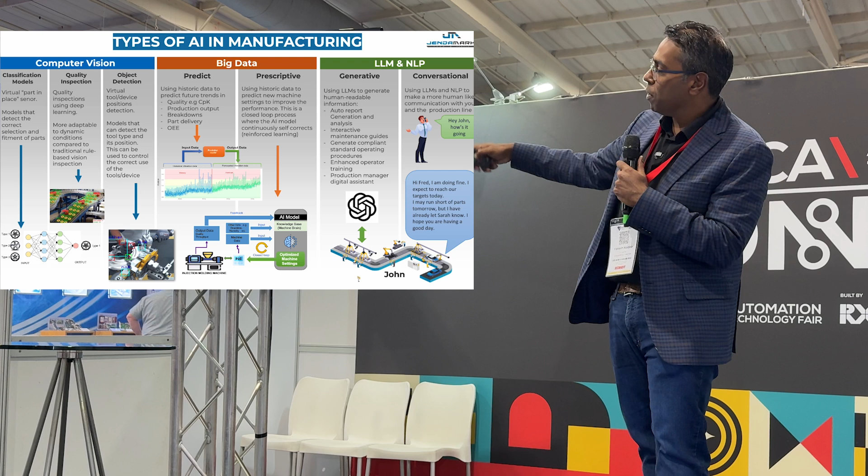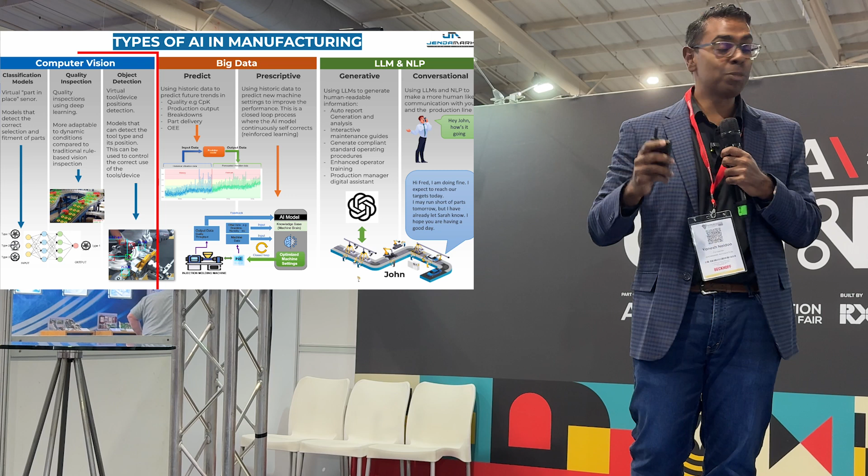So I'm going to start off with computer vision. Computer vision is a very simple concept - it's basically the same process we have with our brain. We have an eye that can see a bowl of fruit. The brain processes that based on your years and years of learning about different kinds of fruits, and then it outputs what is in the bowl. As a kid, that's what you go through - you learn that this is an apple, this is an orange - and that's exactly what machine learning from a computer vision perspective is, from a technology perspective.

So this is a technology version of exactly that. You have a camera, some computer system - think of that as the brain - and you can teach this computer system to read the images from the camera and teach it to say there's apples, oranges, bananas, etc. That's ultimately what computer vision is trying to do. When we talk about these fancy terms about machine learning, models and algorithms, all we're doing is writing some software in the computer to recognize and classify what those objects are. So how do we use this in a factory?

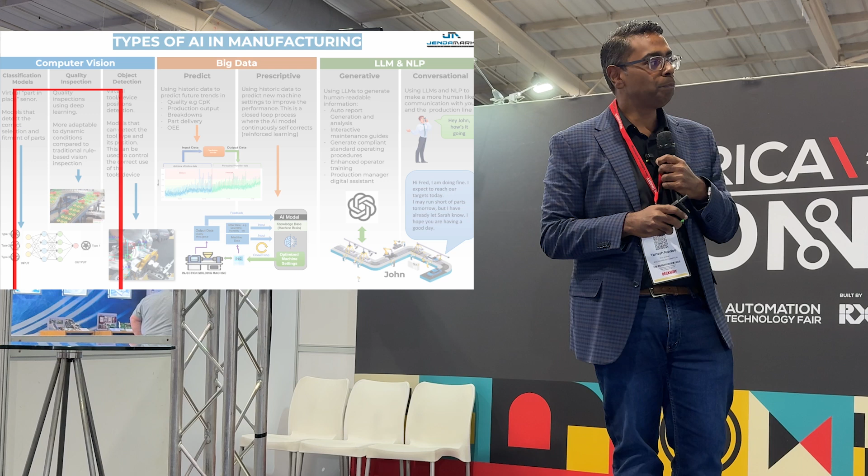Let's talk about one kind of computer vision - the first one is called classification. Classification is very simple conceptually. This is an example of three different types of rims. What we can do is input thousands of images of those three types of rims and call them type 1, type 2, type 3 - that's what we call labeling the image. We can put this into the fancy algorithm - I put this here to make myself look clever, I actually don't know what's going on in there, but the computers do all of that stuff - and out of that, we can then create this model.

So then if I give it an image it hasn't seen before, it'll recognize that that is type 1. And if I put the type 2 rim in, it'll recognize that that's type 2.

So how do we use that in a factory? Today, the biggest use case is actually picking of components inside a factory. So you have these classification models, and a whole bunch of rims. Is your new BMW X5 coming down the line that you've ordered with 25-inch rims with low-profile tires? The robot needs to know which rim to go and pick to fit onto your BMW X5. You can use a classification model to select which rim needs to go into your particular car. The algorithm can do that, and then you pick the right rim. Today, what happens is a human goes there and recognizes the rim type, maybe puts that into a machine that then gets automatically put in there, but now we can close the loop in that picking process.

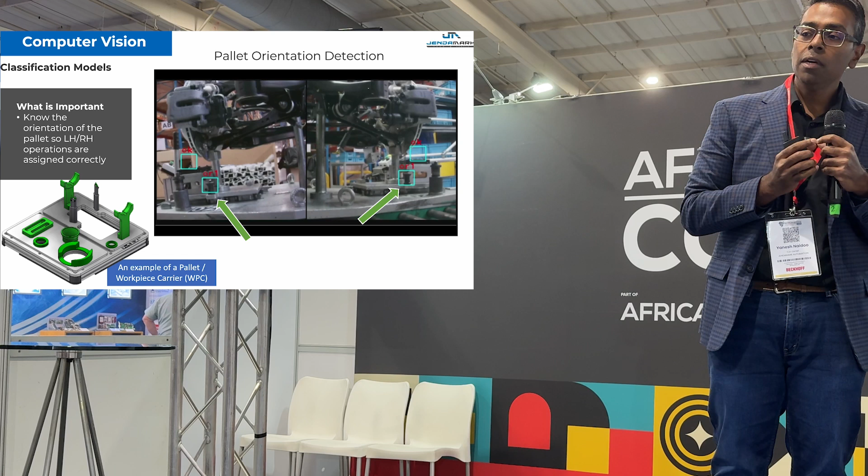Here's a real example, sticking with the BMW theme. This is a video from BMW in Rosslyn, a supplier to BMW. These are the X3 axles, and what we've done is created a classification model to determine the orientation of what we call a pallet. We assemble the axle on our big production lines on this pallet. What's very important is that we need to know left and right, because if I'm tightening the left-hand bolt, I need to know the axle is in a certain orientation so I tighten the right bolt. So you always need to know the orientation of the pallet.

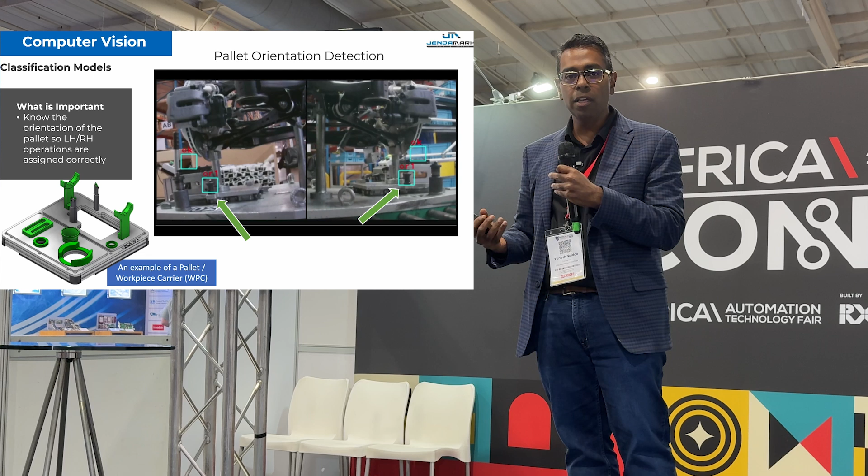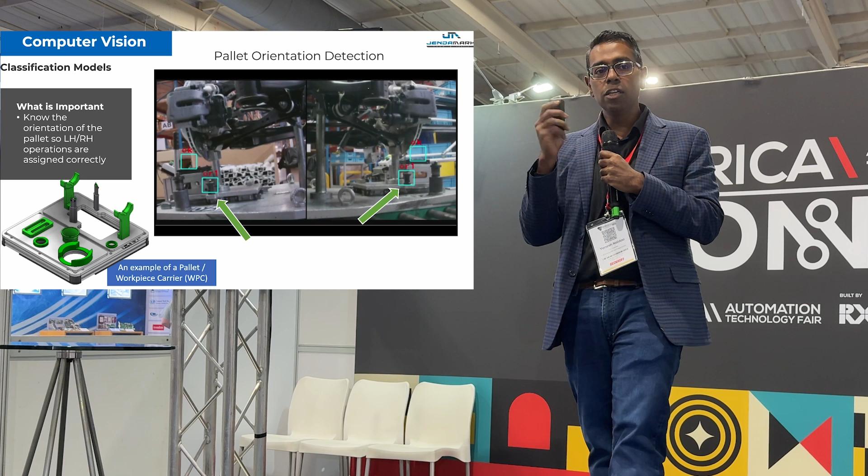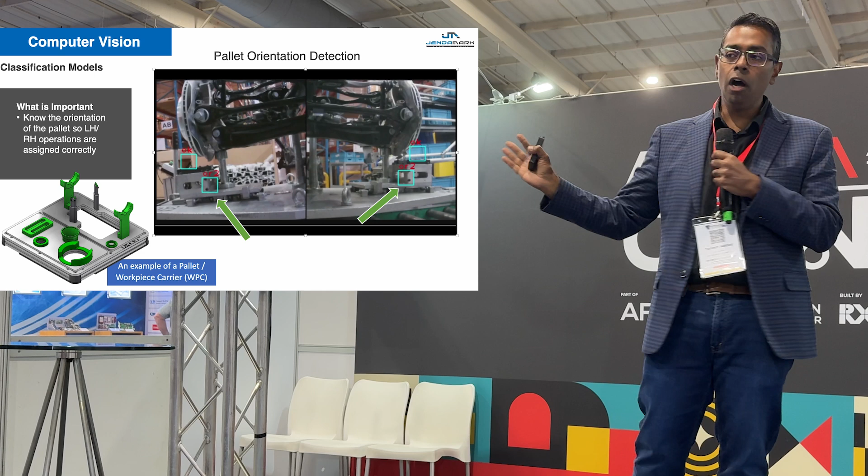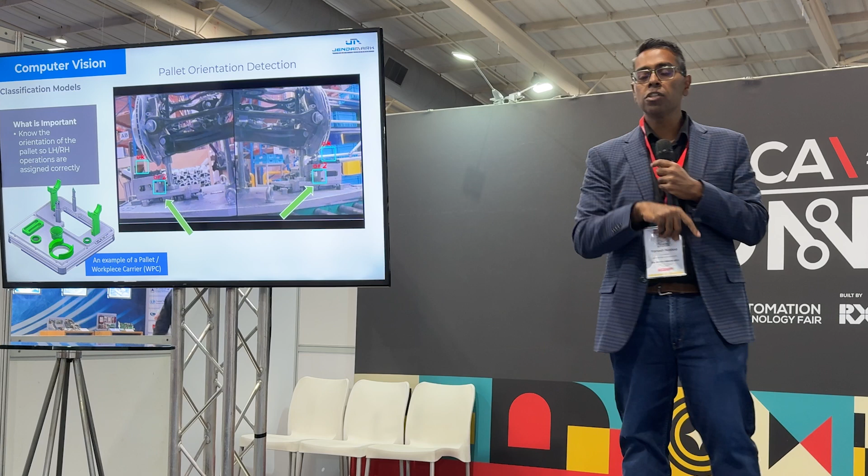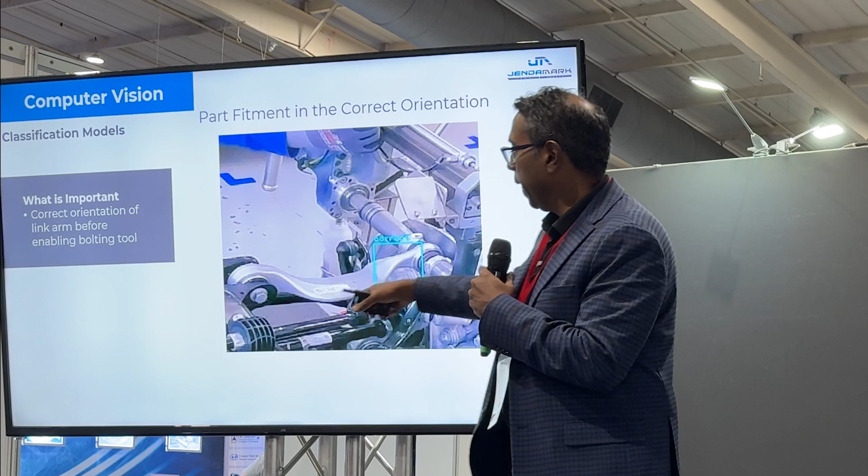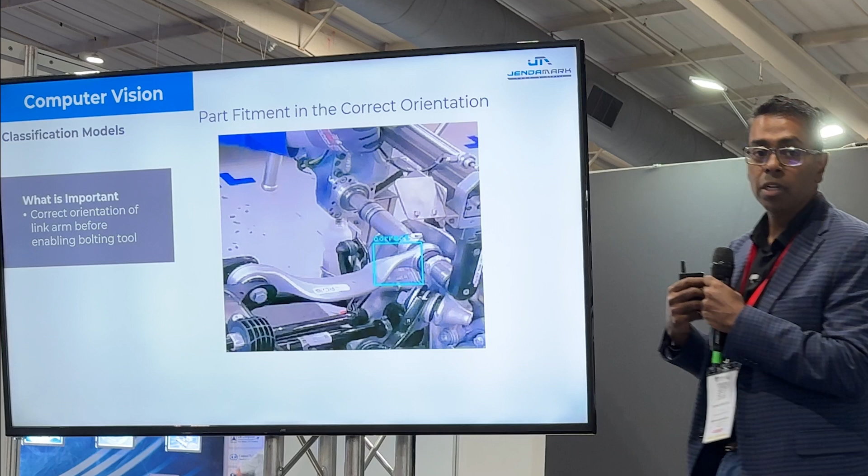The next example is very critical. You definitely don't want to buy a BMW with this, what we call a link arm, in the wrong position - you can see it's a banana shape, and you don't want the banana shape the other way around. So this is detecting that it's in the correct position. When it's correct, we allow the operator to switch on the tightening tool to tighten the bolt. If it's in the wrong position, the camera tells the bolting tool not to switch on. That's how we can now control what was previously not possible - the orientation of that link arm. It changes the dynamics of your vehicle.

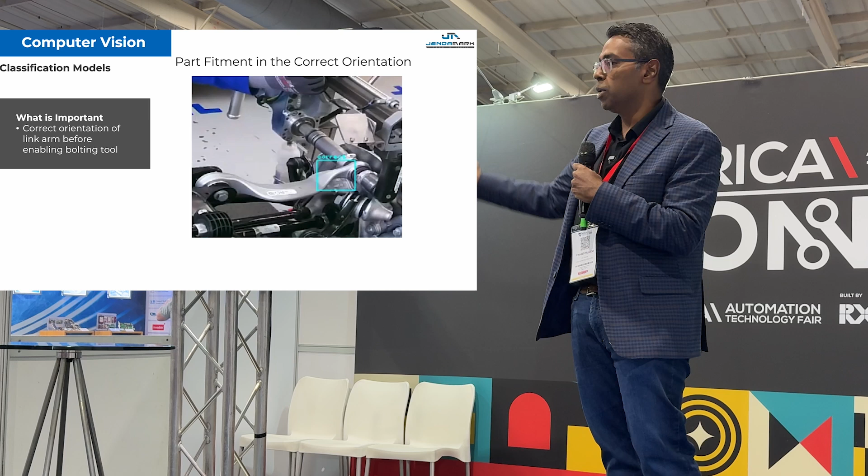So here, again in the video, when the operator turns it around, the other link arm is in the wrong position, and we basically say 'other' - and when it's other, we don't allow the bolting tool to switch on, so the operator can't make a mistake. This is an example of how we use technology to reduce the skills required by an operator to make effective quality components. I think the concept of technology requiring more skills on the shop floor is a misnomer. Technology should be reducing the skills barrier so more people can enter the workplace without skills, and enabling those people to work effectively.

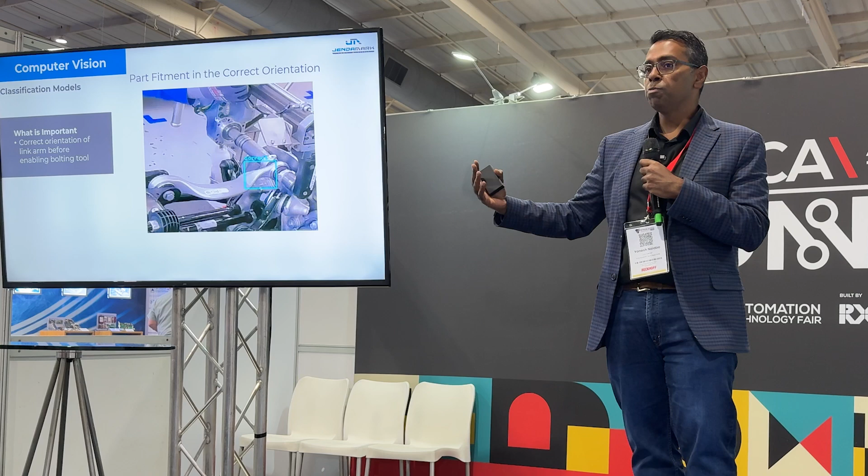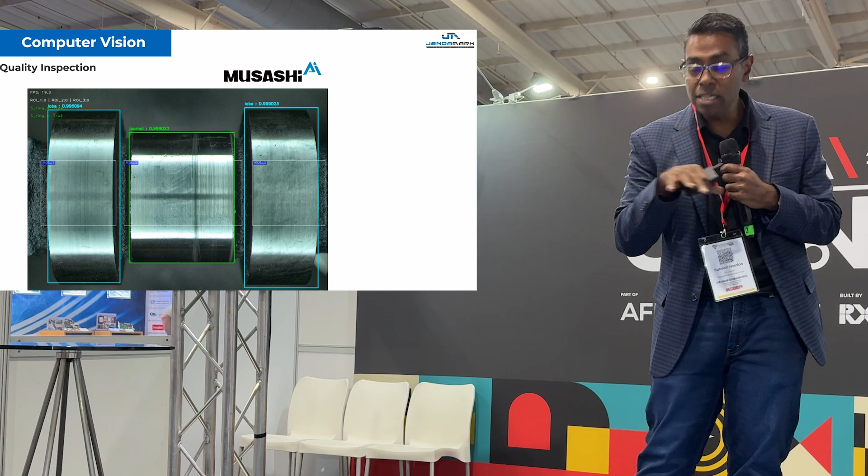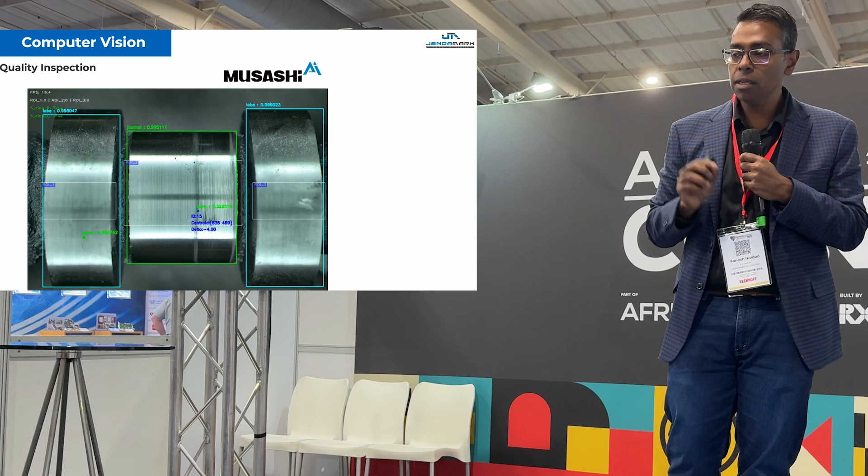Another example, another kind of AI that is used, is quality inspection - I think this is the most common one. I'll quickly breeze through this, but this is an example of a very difficult component to inspect: a camshaft of an engine. You have these small imperfections on a camshaft that need to be detected, and only very trained operators with years of experience identifying these little blemishes on these precision surfaces are able to detect these faults. Now, Musashi has created a model that can actually detect these blemishes inside these very critical components that go into an engine.

Another use case of computer vision AI for quality inspection. I'll quickly show you the next couple of examples, and get through the animations.

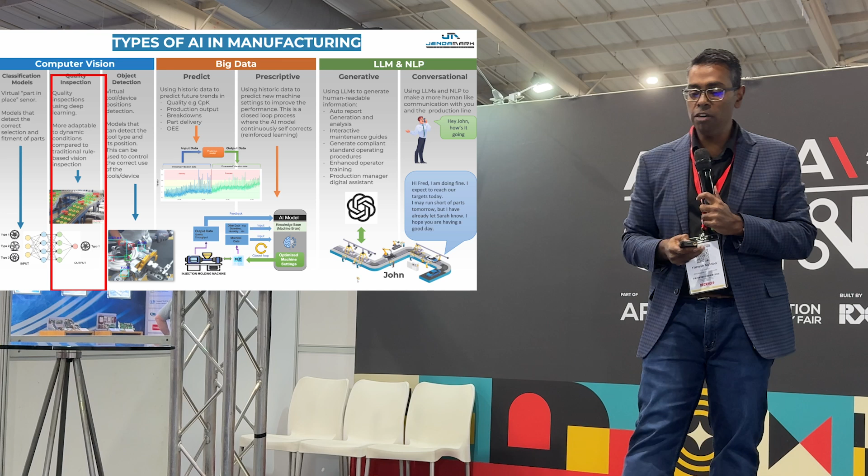Probably the most interesting part of computer vision, I think, is this concept called object detection - how we can use computer vision to detect objects in 3D space. Think of a self-driving car: there are cameras that detect objects, classify what the object is, classify where it is, and make a decision - do I run Andre over, or do I avoid Andre? These are the object detection models running in self-driving cars.

But how can we use that concept on the shop floor? This is an example of object detection from a concept perspective. We have an input image or video, some clever stuff happens - and I call it that because I don't fully understand what's going on inside those boxes - and the output is what we call an object detection model. It can determine it's a dog, and the coordinates of the position of the dog, a person, and a bicycle. So I know, in 3D space on a video, exactly what the live coordinates are of an object, no matter what the object is.

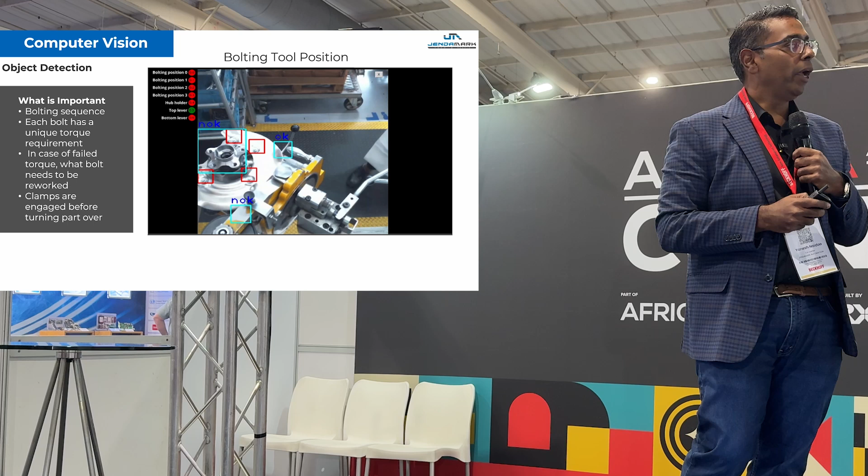Here's an example where, in this case, it's out of scene at the moment - the object we're tracking is actually a bolting tool. Before I play the video, let me explain why this is important. You see these four bolts being tightened - this is a BMW X3. The sequence in which we tighten those bolts is important, because you never tighten in a circle, you tighten zigzag. There are many components in a car that need to be tightened in a certain pattern.

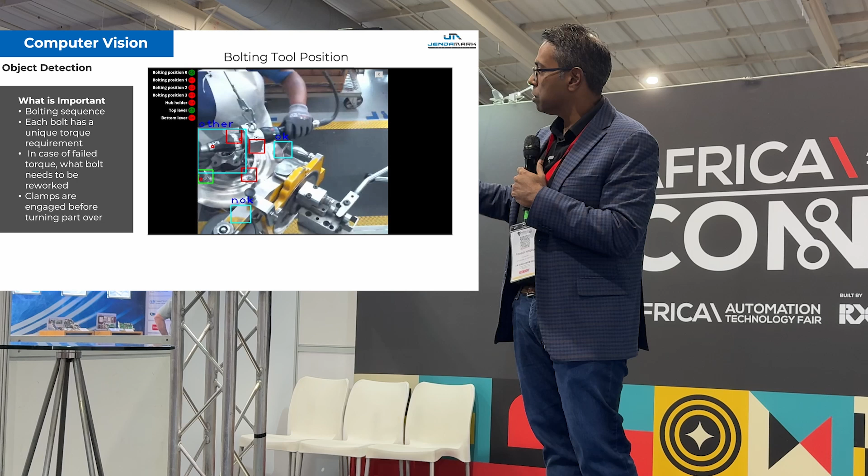So how do you ensure that pattern is adhered to? Only when the bolting tool comes into the right region of interest, as we call it, do we switch the bolting tool on. The operator can't pull the trigger unless it's in the right position, and you'll see that now. She brings it into position, takes it to the first position - you can see the three dots are the key points of that object, the socket - and only when it's in the right position do we switch it on.

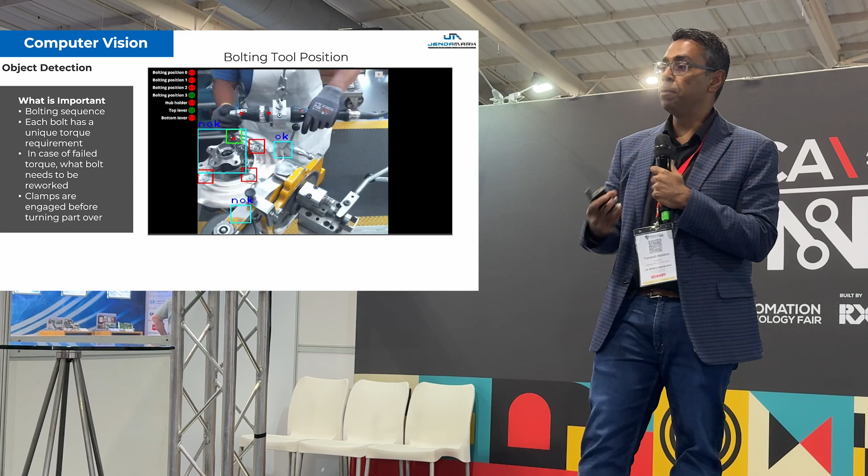What we're doing here is reducing the skill required for a person to perform this operation - we're not increasing the skill needed to use the technology. Technology is actually lowering the barrier to entry for people to get jobs. So this notion that AI is going to take jobs away - I think that's not entirely true. It can in some cases, but in many cases it can actually create opportunities for people.

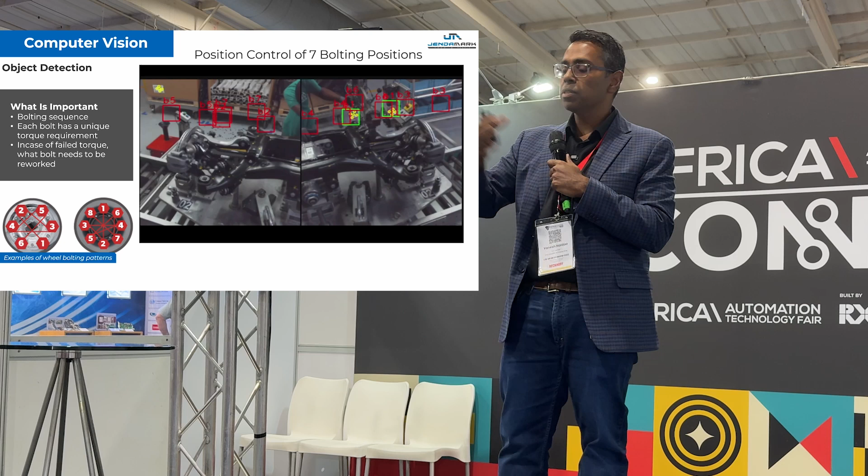Here's another similar example in the same factory, where we're checking the position of the bolting tool. There are basically seven positions the tool needs to be in, and the operator needs to remember the exact sequence. If you do this eight hours a day, it's very easy to make a mistake. Now the AI is tracking the position of the bolting tool, and if it's in the wrong position, we flash a red light to say go to position one, two, or whatever it is. It's exactly the same concept.

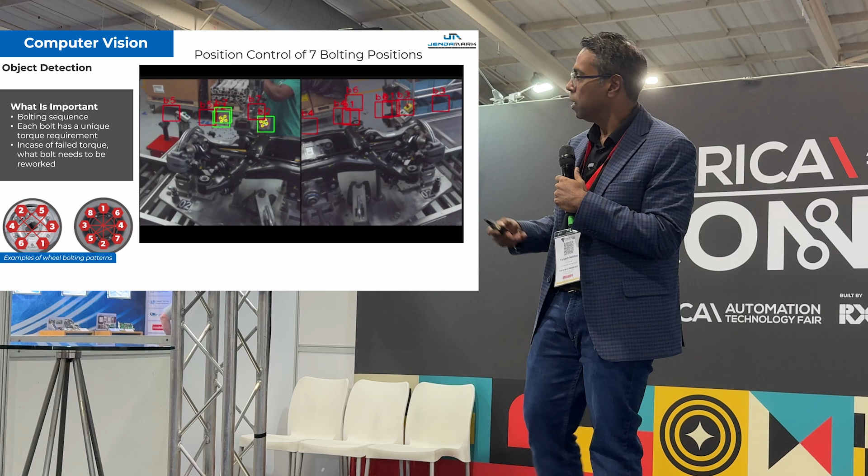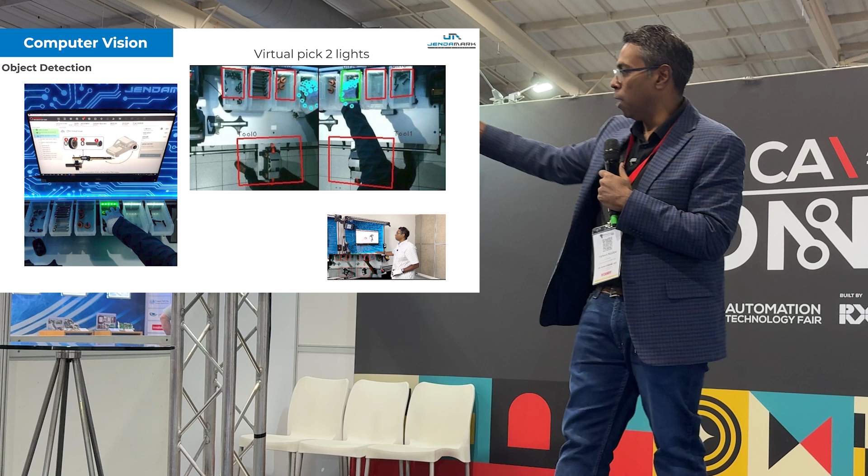This is an example of tracking the hand. This particular video shows me going into a bin to pick the right component - if my hand goes into the wrong bin, it flags it and tells the operator wrong bin. So I can track the position of the hand to ensure I'm picking the right components from a part bin, for example. Probably one of the coolest ones I really enjoy is to replace various components on a factory.

So here, what I'm simulating is a push button. You'll see it in the video. I have a sticker, which costs all of a few cents, and using the same AI model, I'm able to put my finger on the sticker and simulate a physical push button. So now I'm virtualizing physical devices, and I don't need those physical devices. You walk outside and find all the push buttons - to get a push button to work inside a factory will cost you 10K before you start. Now I've virtualized that, which means I can make 50 push buttons if I want - one for the left-hand operator, one for the right-hand operator, or any number of these virtualized devices because it's software.

That's the opportunity with AI. This idea that the stations are going to get more expensive is completely incorrect - I think the stations get cheaper and much more flexible using AI. So that's computer vision. Just watching my time.

I'm going to breeze through the big data as quick as I can, but there are two sections within big data: predict and prescribe. On the big data side, there's a couple of examples I want to share with you - the first is the most common one.

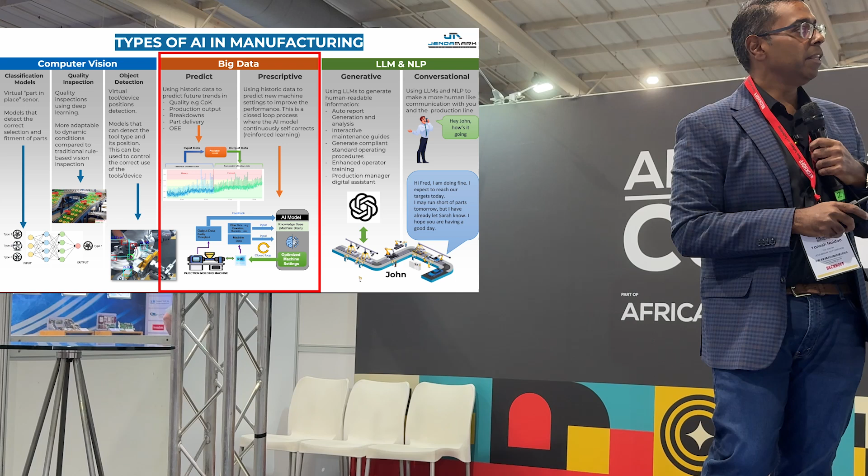Predictive maintenance has been a hype for a long time, and everyone talks about it, but basically what it is, in this case, is a vibration profile of a machine. Think of your pool pump, your fridge at home, your aircon at home - when you walk past that fridge and it's sounding funny, vibrating differently, that means there's a problem. The vibration sensor detects that, and with some clever stuff in the background it's able to predict what it's going to look like into the future, so you can proactively call someone out to fix your fridge. That's what you do on any vibrating asset.

These are very simple models. The hard part about vibration is actually sampling it at the right speed, which is not an AI problem or a technology problem - you can find high precision vibration sensors out there, that's not going to be an issue. But it's a very simple concept. There's a lot of hype around predictive maintenance, but it's not a very complex concept - you just think of your fridge, you walk past and hear it sounding different, and you know there's a problem.

What is interesting is another concept called autoencoders, and you can just replace the word autoencoder with the concept of anomaly detection. So how do I detect anomalies? The autoencoder concept is very simple - this is slightly technical, but bear with me.

Imagine I input a picture of a cat. An autoencoder is basically like zip files - you guys know zip files. We shrink that image down as much as possible to the smallest possible size, and then I have a decoder that decodes that image to try and replicate it. What I do is compare the input image with the output image, and the difference tells me my error.

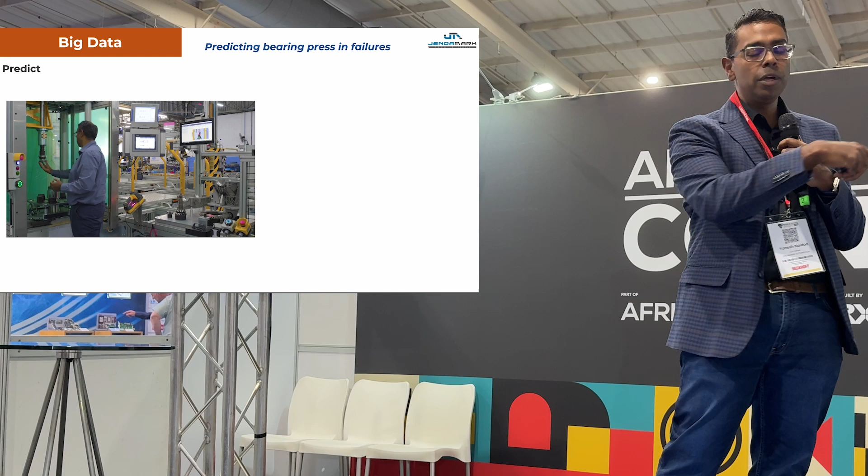So how have we used it? Here's me on one of our production lines, fitting in a set of bearings that get pressed into a differential - the differential is obviously a key part of the car. What you'll see here is me loading the differential, and it's very important that we monitor the force and displacement of the bearing.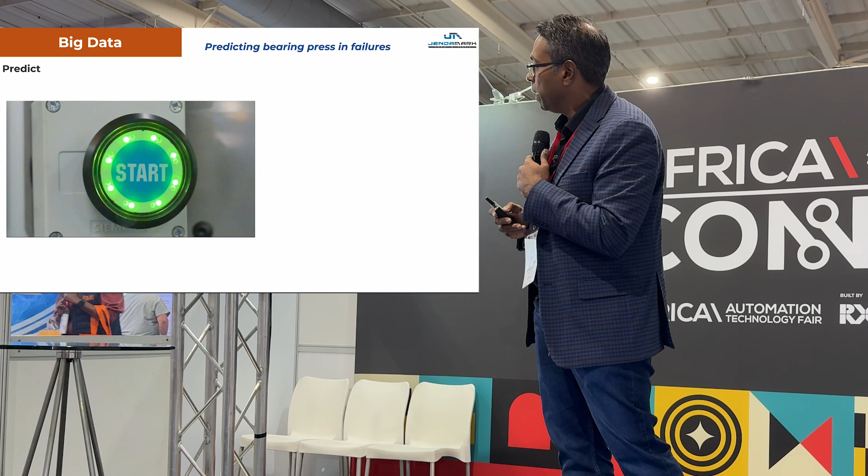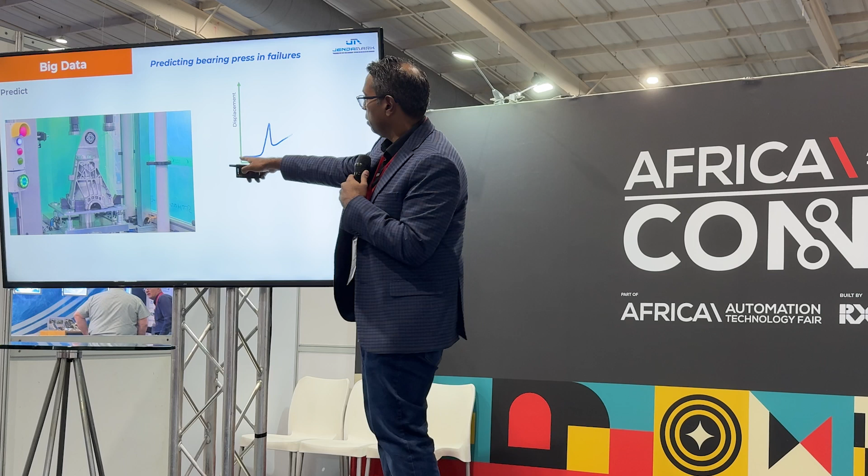Basically what happens is when you start the machine, there's a force displacement that we monitor. As you press the bearing in, the displacement goes up, the force goes up, and you have this thing. This is where it makes contact, and then it needs to rise up like this.

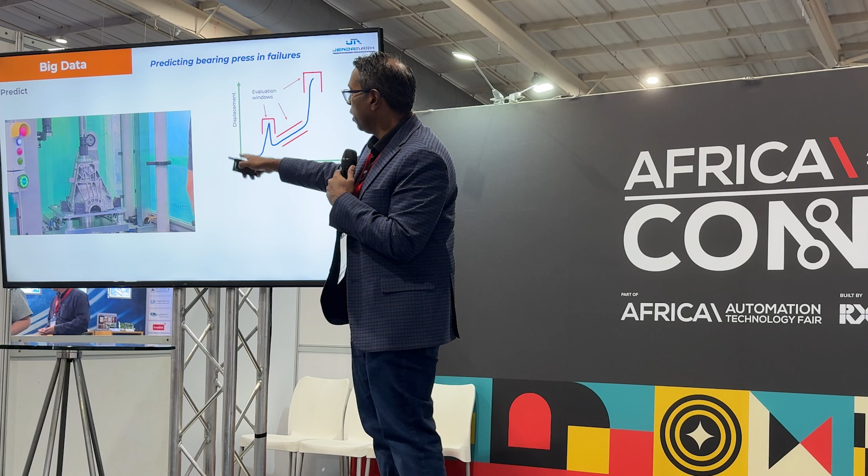What we do is we put these evaluation windows, and this force and displacement curve needs to go through these evaluation windows. If it does that, we know we're good. This is the way we've been controlling production lines for 20, 30, 40 years now.

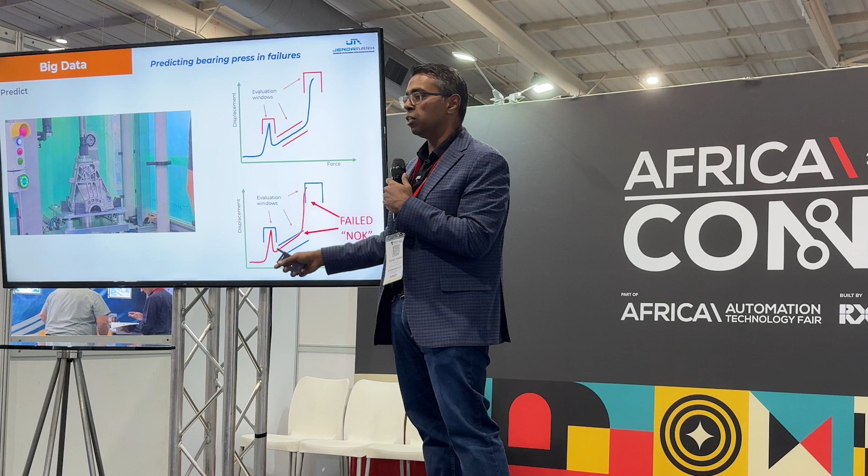What happens is if there's ever a situation where the force displacement curve goes out of the window, we fail the part. But what happens is when this fails, it's too late. The part's bad, you stop the line, and now what? Now you go through this fault-finding process.

So is there a way we could use this data we've got to help us predict when a machine's going to fail? So yes, we can.

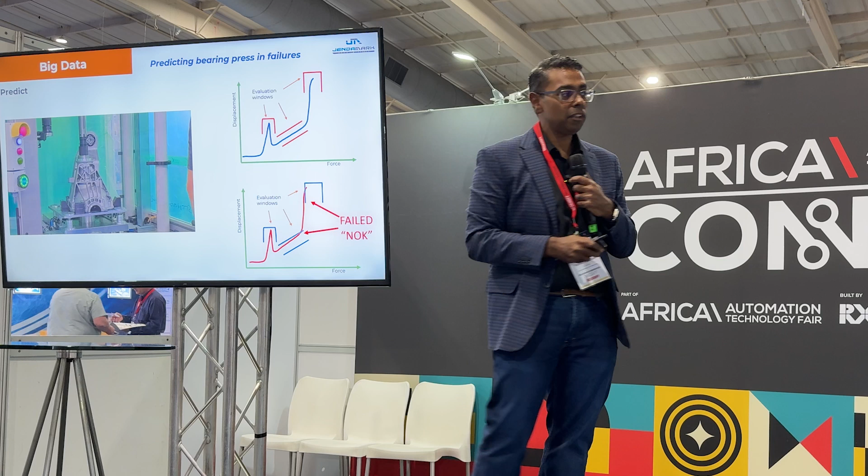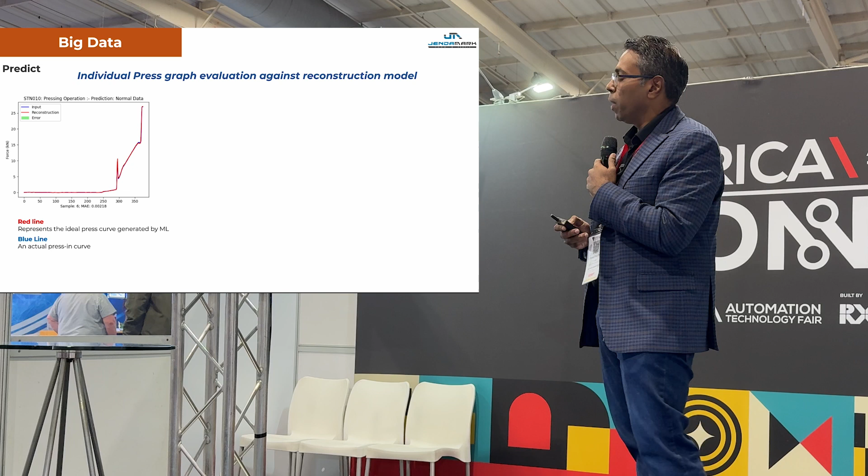You do this with basically an autoencoder. We feed in hundreds and hundreds of graphs into an autoencoder. We get the ideal graph out of that. And what I can then do is input that graph into the autoencoder, and I can determine these different errors - in other words, the difference from the ideal versus the actual.

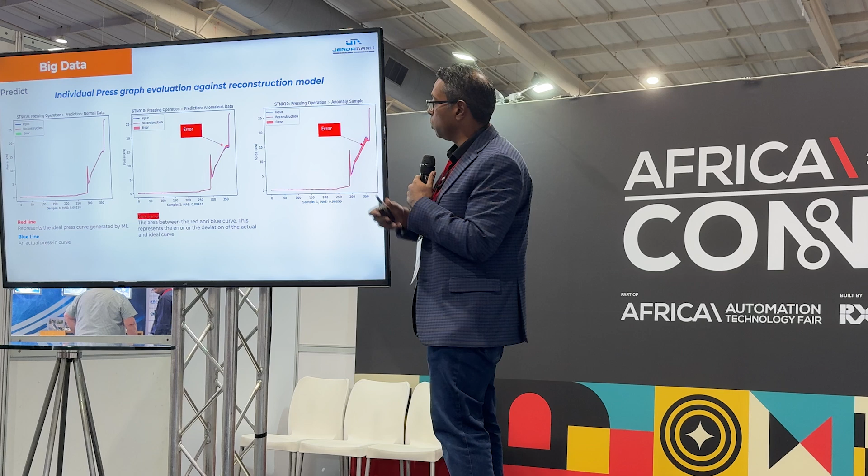The size of the area between the graphs tells me how big my error is. I can then do some simple evaluation on that and say, okay, if I have errors above a certain size, and if I have 5 of them in a row, I want to flag and stop the line. But bearing in mind, these parts are still okay - they're not bad parts, but I'm now predicting there's an error or a failure on its way. So this is an example of how we can use autoencoders for predictive maintenance on machines.

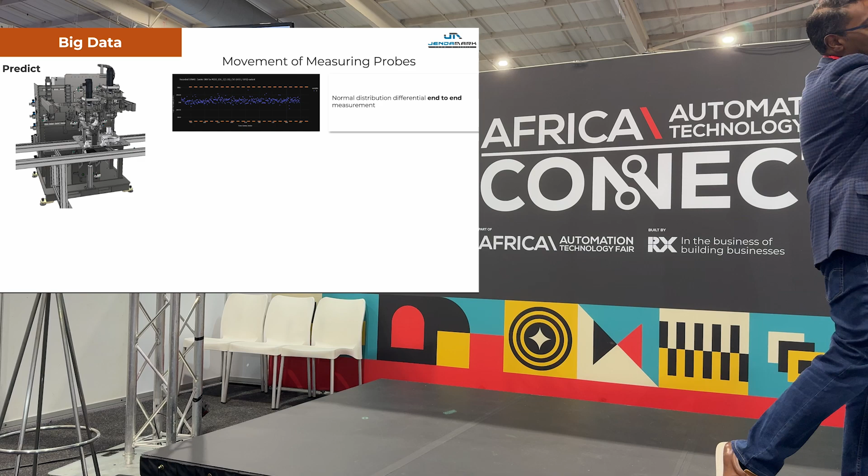Then another example - this was an unfortunate situation that happened to us. This is a gauging machine that we've delivered to a customer, and basically the measurements that come out of the machine are within those bands. Just to give you some context, this band is 50 microns, so 0.05 millimeters. It's tiny, and that's the range we're trying to measure.

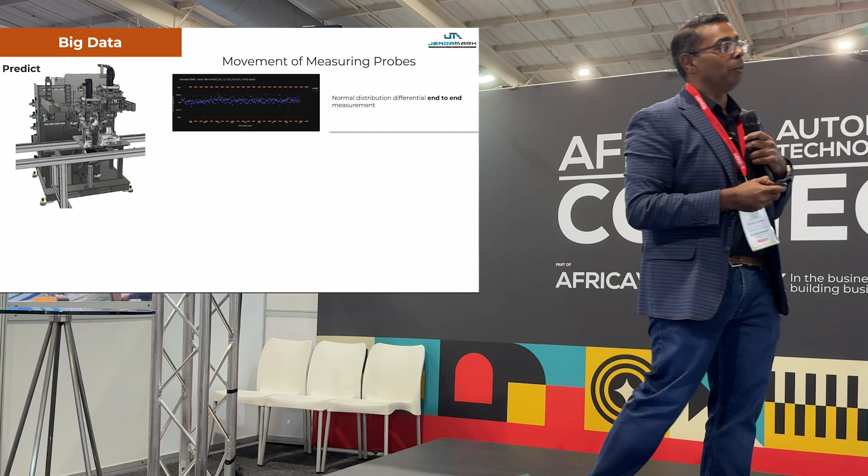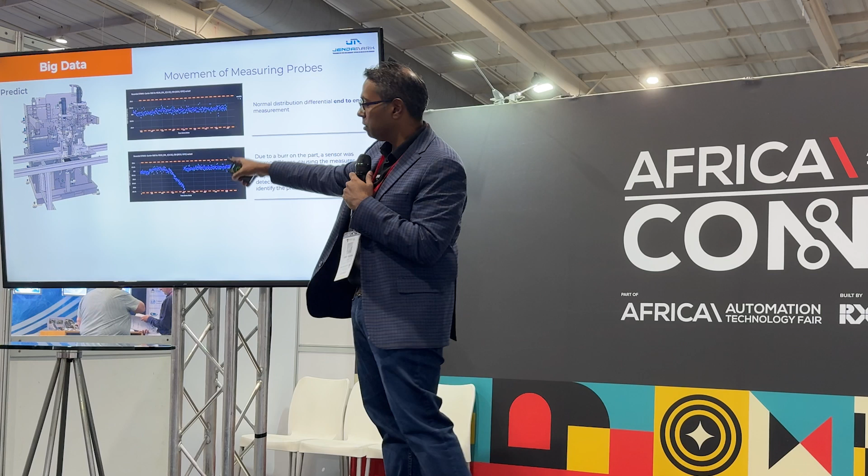What happened was one of the components in the machine had a burr from the machining center. It knocked one of the sensors, and now we started measuring incorrectly. But it was still within range, so it didn't fail - it was still a good part according to the machine. But we were measuring incorrectly because the sensor got bumped.

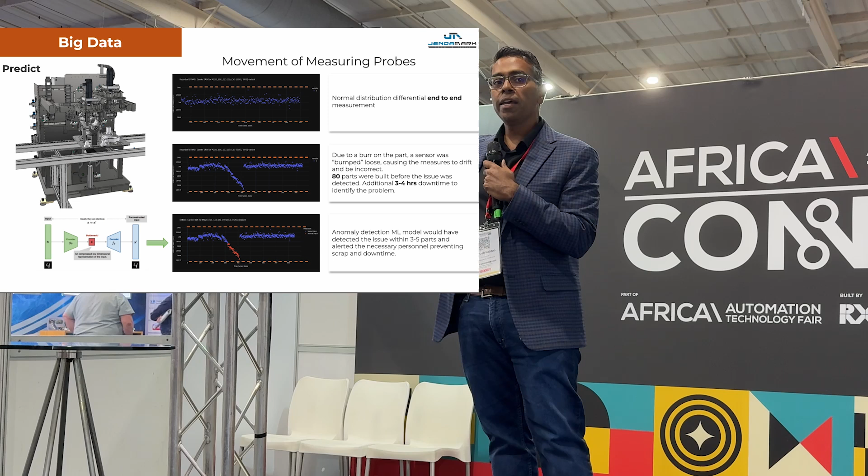If we had an autoencoder, in retrospect, we would have picked up this problem much sooner. So it's another example of how we can use AI to predict and help us prevent problems going into the future. I'm going to quickly get through because I'm getting flagged at the back over there.

Prescriptive - I'm going to get through this one quite quickly, it's a very simple concept. You have a machine, you have a lot of output data that goes through that. I have some input data that goes into a control system or PLC or whatever that is. And then I have a brain, an AI model that's now inputting all of the data of what was put into the machine and all the data that's come out of the machine.

Whether it be quality, speed, whatever that might be. And then I can create a brain that basically sets more optimized parameters to the control system to improve for quality, to improve for output, or whatever that might be. And that's basically what a prescriptive model is.

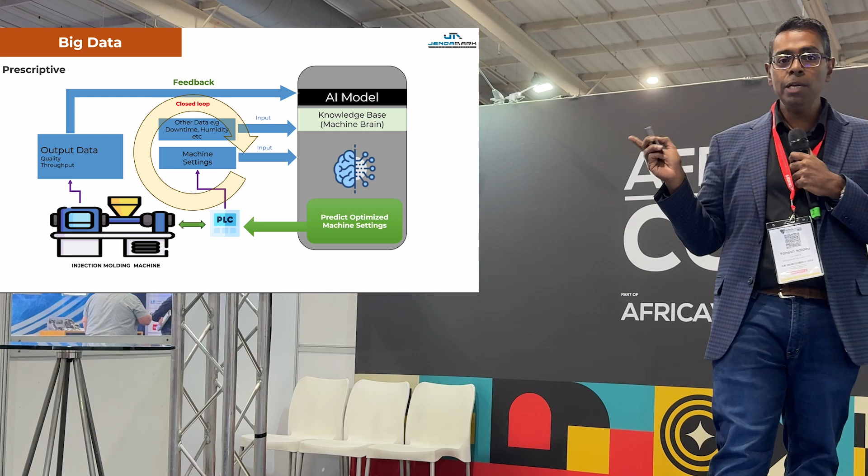What I can tell you is - I'm going to breeze through these slides quite quickly - we've tried this ourselves and failed horribly. This is an extremely difficult thing to get right on a live production line, to have prescriptive models. We tried to do this on one particular application to improve the output of a production line of a differential, to select the right thickness of a shim. And we've basically only gone from 70 to 80% first time through.

And the message I want to leave with you here: this is where the hype gets too hyped. There's a reality to trying to get these models to run live on a production line. It's not that easy. If you're interested, there's one company in Cape Town called Atlantis Foundries that has really done it well—in a foundry, it's really amazing.

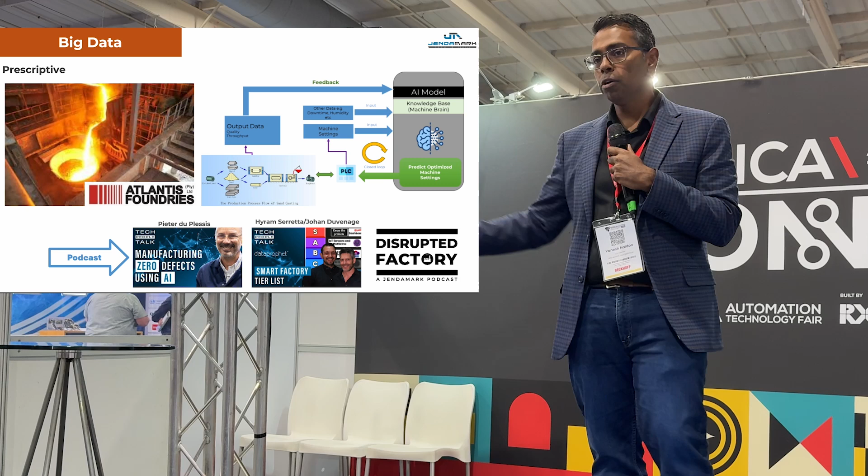I actually have a podcast, and I had the MD, Pieter du Plessis, on it. He talks really elegantly about how they've gone through a mindset shift to actually implement prescriptive AI using a company called DataProphet. So check out the Disrupted Factory podcast on YouTube, and you'll see his whole interview.

I'm going to skip the large language models, because I'm pretty sure between today and tomorrow there'll be lots of chatbots and ChatGPT stuff. But what I did want to share with you is something new that is happening.

The idea here is, imagine I played this for 8 hours non-stop against the robot. Eventually I would lose a game, because there's no way as a human you can be repeatable in this. Conceptually, this is a very interesting opportunity that we've got here.

So let me show you how we put that together. The first thing is, obviously, there's a robot—it's collaborative. There's a vision system that's actually checking the X's and O's. Then there's another brain which you don't see behind there.

This is the brain playing the game against me—the AI model that is actually trying to beat the human. So it's now obviously trying to beat me. Fortunately, it's just noughts and crosses, but you can program the model to try to achieve a certain outcome.

And now there's physical things—it can see, it's got some physical actions. And then there's a human that's obviously part of this whole story—that's me. So these are the four elements we put together to form a system where a human and a machine can interact intelligently together.

Because it's playing against me, it's trying to beat me, and I'm trying to beat it. But let's aggregate that out into a much broader concept. There's a new buzzword that lots of consultants are talking about called agentic AI. The idea of agentic AI is basically autonomous decision making—this brain is making decisions autonomously of me.

I've not given it any input—we've programmed it to make decisions against me. So let's aggregate that out to a whole production line, not just one machine. We have a big production line with lots of little AIs. All of the slides I've shared with you up until now, I'd term as little AIs—the computer vision, the prediction, all of those things are little AIs that we can plot on a production line.

But what doesn't exist yet, though it's definitely on the way, is the whole big brain of the production line. What do you want to optimize for—quality, throughput, or whatever that is? I call that the supply chain optimization agent. This is the thing we need to train on what we want out of the system.

And the scary part of this: at the moment, if you want more output, it's a human that gets involved—I want to produce more, switch the line faster, put more operators on the line, whatever that might be. So there's still humans making that decision. But if we get this model right, the human becomes a much smaller part of this production process. That's why I put the human in gray over here.